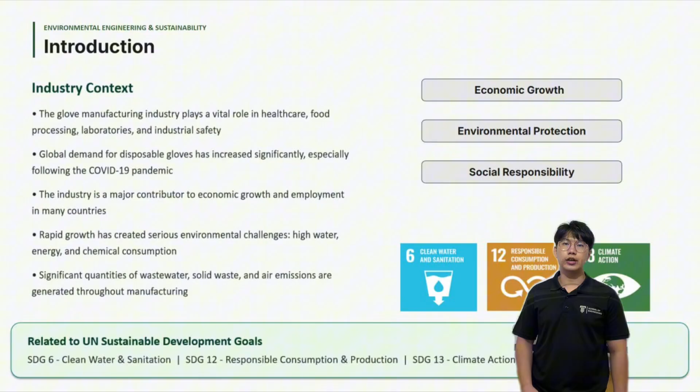So, according to the principles of sustainable development, industry should meet present needs without compromising the ability of future generations to meet their own needs. Sustainable manufacturing aims to achieve a balance between these three key pillars: economic growth, environmental protection, and social responsibility. Therefore, glove manufacturers are encouraged to adopt cleaner production methods, improve resource efficiency, reduce waste generation, and recycle or reuse resources whenever possible.

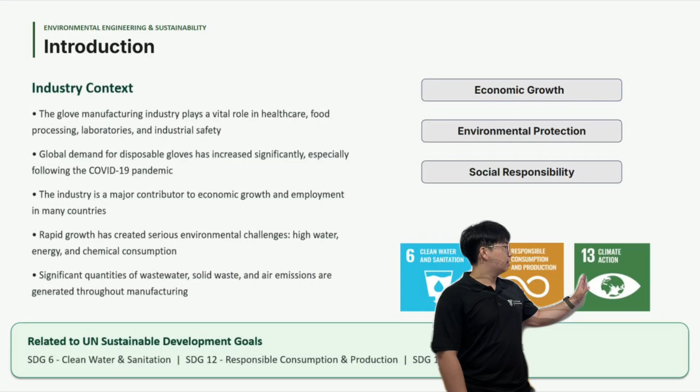Our topic is closely related to the United Nations Sustainable Development Goals, particularly SDG 6, clean water and sanitation, by ensuring industrial wastewater is properly treated before discharge. SDG 12, responsible consumption and production, by reducing waste and improving resource efficiency. Lastly, SDG 13, climate action, by minimizing greenhouse gas emissions and promoting sustainable industrial practices.

In this presentation, we will explain the glove manufacturing process, identify the main waste sources and waste types, discuss the environmental impacts and waste management challenges, and review the relevant environmental regulations. Finally, we will present our proposed wastewater treatment process design, which aims to reduce pollution, comply with environmental regulations, and support sustainable industrial development. With that, I would like to hand over the presentation.

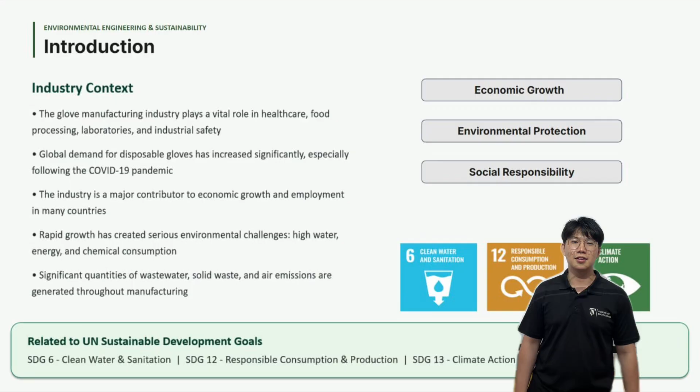Thank you, Isaac. Before discussing waste management, it is important to understand how gloves are manufactured. The main raw materials used include natural latex or nitrile rubber, calcium nitrate coagulant, sulfur vulcanizing agent, chemical accelerator, stabilizer, water, and various cleaning chemicals. Each material serves a specific purpose in producing gloves with good elasticity, strength, and durability. Let's go through the manufacturing process step by step.

Okay, first step is compound preparation. Natural latex or nitrile rubber is mixed with additives such as sulfur, stabilizer, antioxidant, pigment, and accelerator to produce a uniform rubber compound with suitable physical properties. Next, the second step is former cleaning and coagulant dipping. Ceramic hand-shaped molds known as formers are thoroughly cleaned to remove contaminants. They are then dipped into a calcium nitrate coagulant solution, which helps the rubber adhere evenly to the former during the next stage. Third step is latex dipping.

The coated formers are immersed into the latex or nitrile compound, forming a thin layer that will become the glove. After dipping, the glove undergoes leaching. During this process, warm water is used to remove excess protein, chemicals, and residual coagulant from the glove surface. This improves product quality and reduces the risk of allergic reaction. Next is vulcanizing. The gloves are heated at high temperature, allowing sulfur to cross-link the rubber molecules. This greatly improves the glove's elasticity, strength, and durability.

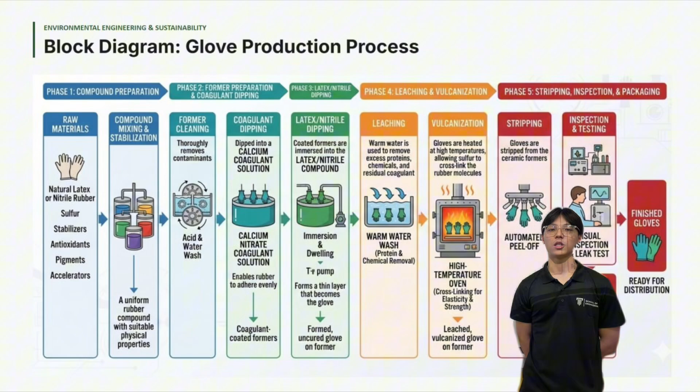After vulcanization, the gloves are stripped from the ceramic formers, inspected for defects, tested for quality, and finally packed for distribution. Although this manufacturing process is highly efficient, it also generates significant waste. Large volumes of wastewater are produced during washing, leaching, and cleaning operations. Rubber scraps and rejected gloves become solid waste, while boilers used for heating generate air emissions. These waste streams must be properly managed to minimize environmental impact. Now I'll pass to the next presenter.

Thank you, Zhao Hua. So the glove manufacturing industry mainly produces three categories of waste, which are wastewater, solid waste, and air emissions. First is wastewater, which is the largest waste stream. Wastewater is generated mainly from former washing, latex dipping, leaching, equipment cleaning, and factory sanitation activities. It contains high concentrations of organic matter, suspended solids, latex particles, ammonia, surfactants, and residual processing chemicals.

If this wastewater is discharged directly into rivers without treatment, it increases biological oxygen demand, BOD, and chemical oxygen demand, COD. High BOD and COD reduce dissolved oxygen levels in rivers, making it difficult for fish and other aquatic organisms to survive. The next category is solid waste. Examples include rejected gloves, rubber scraps, sludge from wastewater treatment plants, used packaging materials, and damaged ceramic formers. If these wastes are disposed of improperly, they occupy valuable landfill space and may contribute to microplastic pollution over time.

And lastly, the third category is air emissions. This mainly comes from boilers and heating systems used during vulcanization. Typical pollutants include carbon dioxide, nitrogen oxides, sulfur dioxide, and particulate matter. These emissions contribute to global warming, climate change, and poor air quality. Overall, improper waste management affects water quality, air quality, biodiversity, and public health. Therefore, effective waste treatment is essential to minimize these environmental impacts.

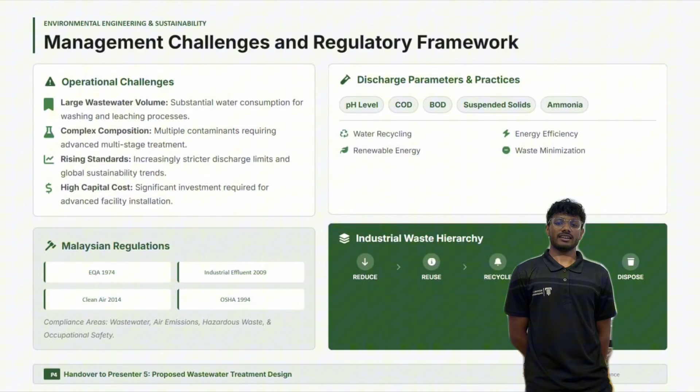Thank you, Roshan. Our proposed design focuses on wastewater treatment because wastewater represents the most significant environmental concern in glove manufacturing. Our design basis assumes a wastewater flow rate of 1,000 cubic meters per day. Based on our material balance, nearly all of the process water used during washing and leaching eventually becomes wastewater. Therefore, the treatment plant was designed to handle the full daily wastewater flow while maintaining sufficient hydraulic retention time in each treatment unit.

The wastewater contains high concentrations of chemical oxygen demand, suspended solids, latex particles, ammonia, and various chemical residues. Our treatment process consists of several stages. The first stage is screening. Large debris and coarse solids are removed to protect downstream equipment. The second stage is the equalization tank. Here, the wastewater from different production processes is mixed together. This equalizes both the flow rate and pollutant concentration, ensuring more stable operation of the treatment plant.

The third stage is coagulation and flocculation. Coagulants are added to destabilize fine suspended particles, while gentle mixing forms large flocs that can be removed more easily. The fourth stage is primary sedimentation. The heavy flocs settle at the bottom of the tanks, reducing suspended solids before biological treatment. Next is the aeration tank, which is the heart of the biological treatment process. Microorganisms consume dissolved organic pollutants, significantly reducing both BOD and COD.

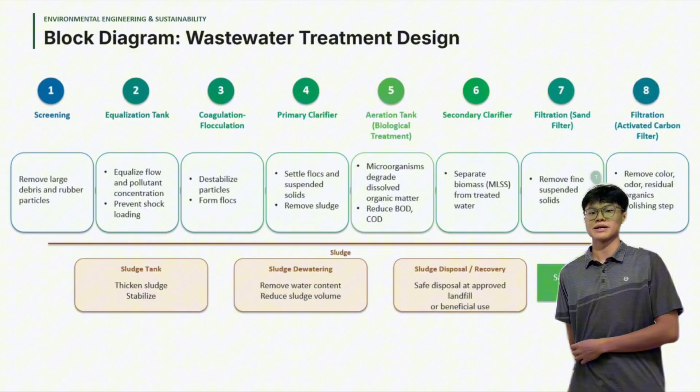The treated water then enters the secondary clarifier, where biological sludge settles out from the treated water. Some sludge is recycled back to maintain microbial activity, while excess sludge is removed for further treatment. To further improve water quality, the treated water passes through sand filtration and activated carbon filtration. These units remove the remaining suspended particles, color, odor, and trace organic compounds.

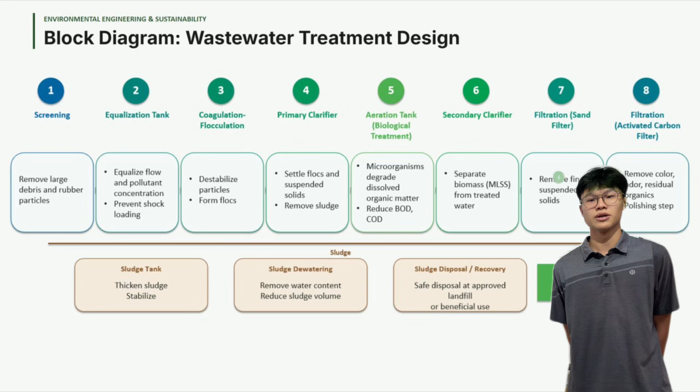Finally, the treated water undergoes disinfection, typically using ultraviolet light or chlorination, before being safely discharged or reused within the factory. The treatment system is designed to comply with Malaysian environmental regulations by achieving acceptable limits for COD, BOD, suspended solids, ammonia, and pH. Here are some of the differences between existing and proposed processes.

Currently, existing treatment includes primary treatment only, water discharge after treatment, higher freshwater consumption, higher pollutant discharge, and limited sustainability. Based on these problems, our proposed treatment is primary, biological and tertiary treatment, with water to be reused, lower freshwater demand, better COD, BOD, and TSS removal, as well as support for circular water use.

Compared with many conventional wastewater treatment systems that mainly rely on primary and biological treatment before discharge, our proposed design includes tertiary filtration and disinfection. This allows treated water to be reused for cleaning and non-potable applications, reducing freshwater consumption and improving overall sustainability. Now, passing over to Isaac.

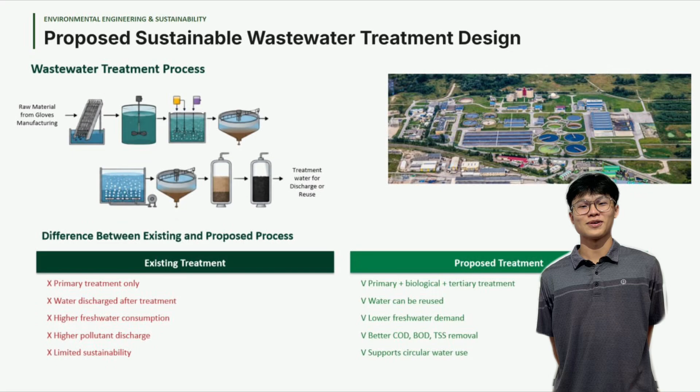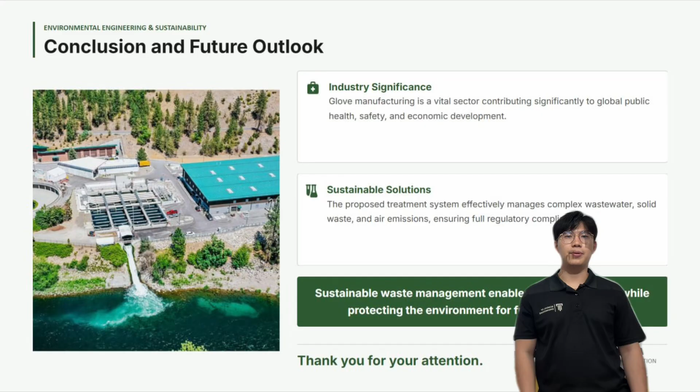Thank you, Terry. So, in conclusion, glove manufacturing is an important industry that contributes significantly to public health and economic development. However, the production process generates wastewater, solid waste, and air emissions that require proper management. Our proposed treatment system provides an effective and sustainable solution by reducing pollution, supporting water reuse, and ensuring compliance with environmental regulations. By implementing sustainable waste management practices, the glove industry can continue to grow while protecting the environment for future generations. Thank you for your attention.